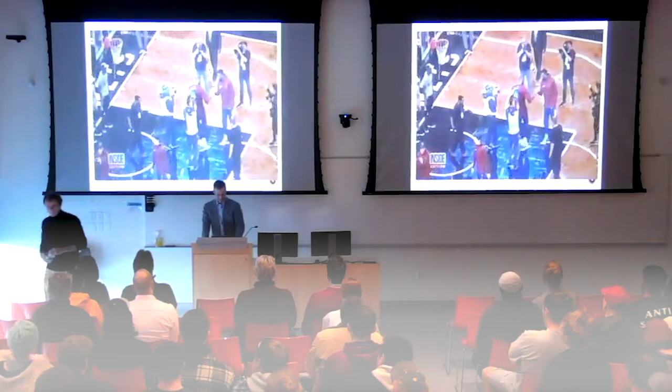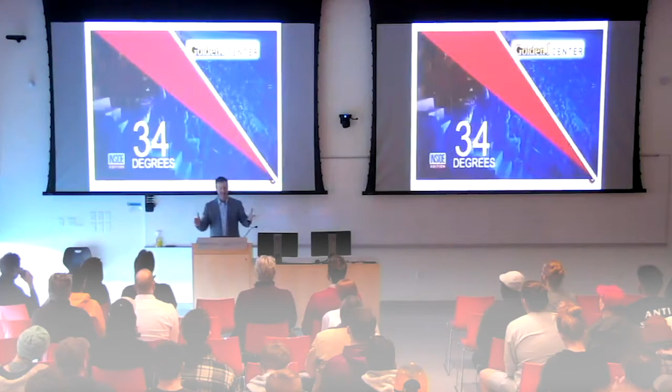Yeah, so here's the steepness as it gets steeper and steeper, because they want the sight lines and they want to save the money and make it a smaller footprint and have more seats that are closer, so they have to go up and up and up. I'm going to stop it at one - it's Lady Gaga. Then the Barclays Center was even steeper.

So then it's just making a commentary about how it's steep and people are falling on each other, and there's a whole bunch of lawsuits being started on that. And then I say something, and then I'll say what I was saying, and I'll pause it. And they had some weird angles of - right about here, all right, I think I stopped it there. So my commentary earlier was that as you have a seat in front of you, right?

So you're walking by, and there's a seat down in front of you, and the higher this gets up, if I'm walking here and I fall, I've got my knee and my hip, I'm not gonna fall too far, it goes down to your knee. At least maybe you can save yourself with your knee.

But when it goes down to your ankle, it's just a tripping hazard. So now when you lose your balance, there's nothing to reach onto, and you just keep falling. This happens more than you know, because when patrons fall, the center gives them tickets to the next night or even season tickets to avoid a lawsuit, because they want to keep selling beer.

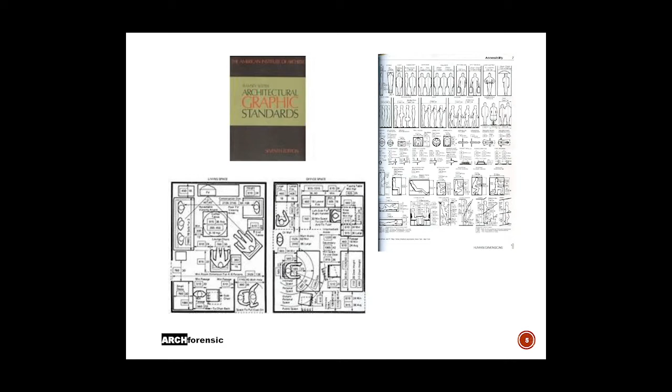So in the Architect's Handbook, here's pretty much a standard definition of the standard of care: it's what a reasonably prudent architect would do in the same community, at the same time, facing the same or similar circumstances. That's a general definition, and it has a location factor, the same in the same community.

Now we're more of a global village. The more we implement model building codes, the more similar you'll be from state to state. Not every state has the same building code, so there's still some location factors. I'm working on a case in El Salvador, which doesn't have the same building codes we have here or the same standards.

One of the standards in their contract was to conform to the ADA code — the Americans with Disabilities Act, a United States federal law. It's not a building code that has to be used in El Salvador, but it was in the contract, so they had to meet that without really any inspectors or anything happening. There was no reason they had to actually meet that.

So you have to adjust your judgment of architects based on location. Ten years ago in Pennsylvania, they didn't even adopt a building code for the state — it was only for cities. I was doing a case out in central Pennsylvania, and there was no building code, so they didn't have to meet any building code. In fact, there were no inspectors or building inspections, so the architect did his own inspections and got paid as a third-party inspector.

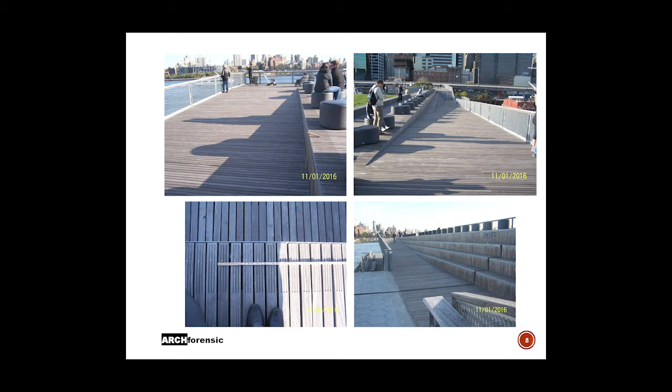So what happens if the code doesn't nicely fit into your design? You could do a design like this, and then you have to look at it in terms of code and ask how the code fits into this design. So they have this large handicap ramp and amphitheater seating, and it goes alongside the amphitheater seating. When it comes down to the sharp wedge here, this part becomes problematic, the sharp point there.

Because that looks like a little tripping hazard at the end - someone's going to come up and just trip over that. If you read this design from the code, when that lift is 0 to about 4 inches, that's considered a tripping hazard in the code, not a step yet. Then from 4 to 7 inches, I'm just guessing, that could be considered a step, although that would be the size of a step.

After that, from 7 inches to about 24 inches of rise, you wouldn't need a railing unless there were 2 steps getting onto that rise. So by that definition, you don't really need a railing across the top of this until it gets to 24 inches. Then you would need a railing. But as you go down to this end here, now this is considered an amphitheater, so since it's an amphitheater, you don't need a railing anymore.

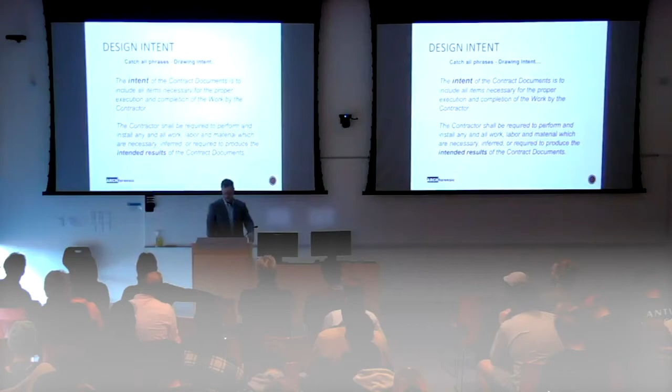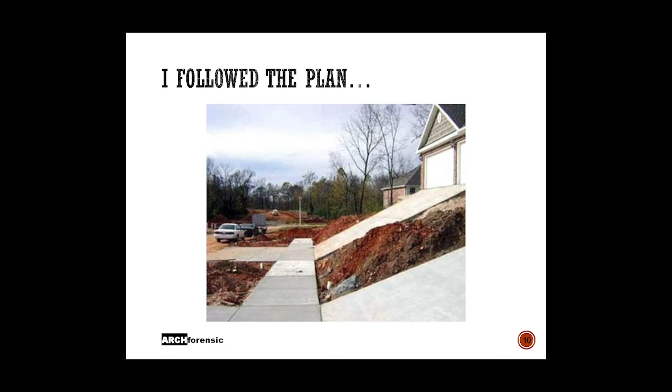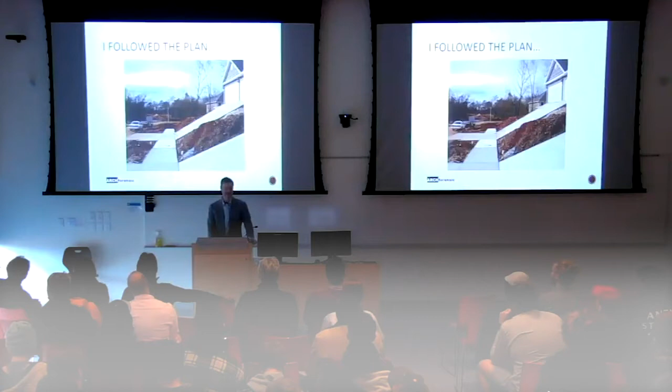So if the contractor or someone's interpreting plans, the plans may say to do this, and if you're looking at it, you might say, okay, that's what I'm going to do. This looks like a development, and on a site plan they may not have anticipated the distance. It looks like when you turn the corner, it's at street level, and they assumed it was flat, but when it turned the corner it was up high. I guess somebody poured the concrete without submitting an RFI.

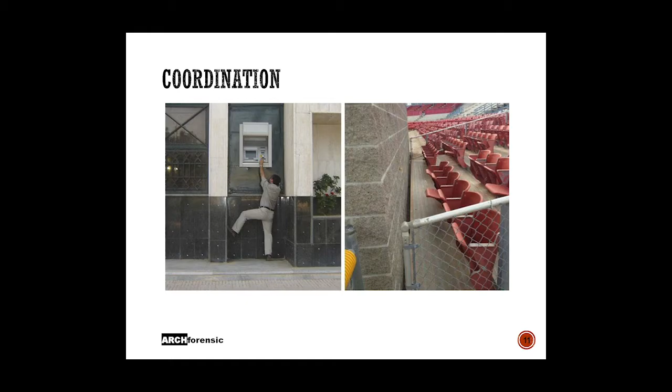Here's another potential coordination issue on the left. If you're doing a plan on the inside of a bank with a teller, and they say let's have an ATM, put the ATM at the end, and there it is, facing out. But if you don't coordinate that the stairs are 4 steps down and the sidewalk, then you'll have something like this happening.

The one on the right, I don't know, I don't have an explanation. So they needed a certain amount of seats, and somebody did not anticipate that wall being there.

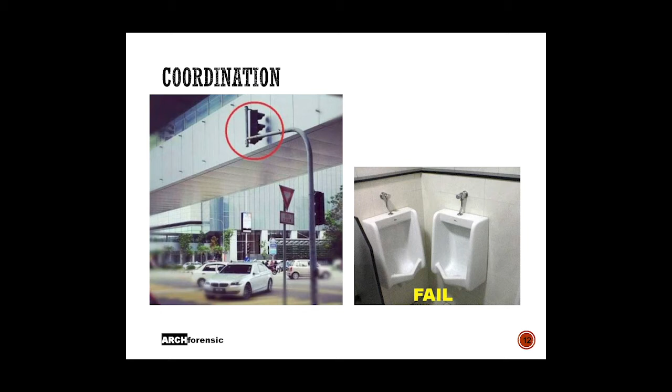There's coordination, there's a thing called Redicheck. Architects do have quality control and quality assurance. They don't have to redo the plans of engineers, but they need to look at them and coordinate them with all the other plans. So if you have a little fan symbol on your drawing and a little projector symbol on your drawings, they don't conflict in the drawing. But once you put the fan in with the blades, then it might conflict.

So this is a potential example of design coordination.

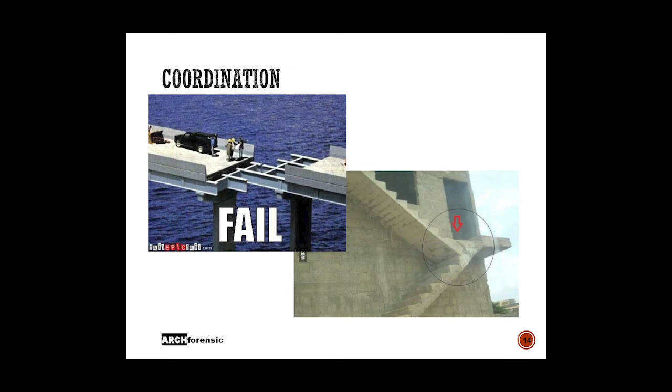I think the bridge one's fake, right? That one looks fake to me. I don't think they would actually do that. I'm not sure. The other one with the facade, I guess in a flat facade that would actually work, but I'm not sure what happened there.

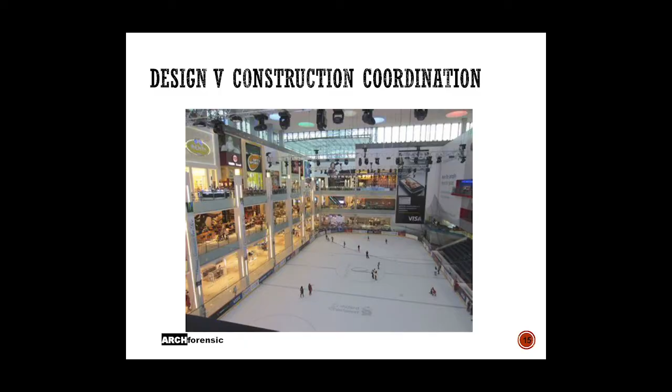So I had a case in Texas when I got a call and a lawyer said, I have a case, the ice is not melting in an ice rink in a Texas mall. And I said, well, why are you calling me? I'm in New Jersey. So I told him I never did a hockey rink, never did a skating rink, never did a mall. So you should go find somebody else. But if you can't find anybody else, I don't know if you'll find an expert who has done an ice rink in a mall before, right? So I'm like, I don't know if you'll find anybody, but if you do, use them. But if not, give me a call back.

Called me back in 2 weeks. He said, I can't find anybody. There's 2 experts who have done this, and they're hired by the other people on the team. So I was hired by the mechanical contractor, who was a sub in all this, and he was just providing the refrigeration to the ice rink. And so that's who hired me, a mechanical contractor. So I came on late in the game. He wasn't the main focus of the lawsuit. I came on late, I read all the other expert reports, and there was the foremost expert on hockey rinks.

And he got deposed. He had this excellent report, it spelled everything out. I read through his report and just started going through. He had all these equations for tonnage of cooling, and I just started going through all of his line items and doing the calculations right along with him, and he was explaining it in his deposition. And he had a factor, and it was just a factor that goes into the formula. So I was looking for that factor.

I finally found the factor, and the factor was: use this factor if you have a reflective ceiling that's less than 24 feet from the ice. That was the factor. So in the mall, you didn't have - and this isn't the actual picture, it was like this, but it had a black ceiling, and it had a food court next to it that produced heat. And all the other HVAC systems were all operating separately. So there's just a big airflow in there, and so it just wouldn't freeze because of that.

Same with a door that's hanging in midair in plan. If you're looking at stairs in plan and don't know which way is up or down, you might think you need a door, pop it in, and not check it in 3D. You could end up putting a door on the wrong side.

The quality control is to check your drawings. When judging and checking drawings for standards, you have to know what your drawings are for. You can have a biddable set that's not really ready for construction, or a biddable set that's not even ready for permits. You could have a permittable set for permits, not for bidding or construction. You have to determine what set your client is asking for, what your next deadline is, and what you're submitting it for.

So there's biddable, permittable, buildable. After the architect does the buildable set, do we build with that one? No. Then there are shop drawings—talking about a bigger commercial building here. The contractors, if it's big enough, will do their own coordination set, starting with structural, foundations, steel, and submit it to all the contractors, often without sharing it with the designer. That happens a lot. Then there's a coordination drawing the contractors do about where they're putting all their stuff, and that's the set they actually build by, not any of the sets the architects made.

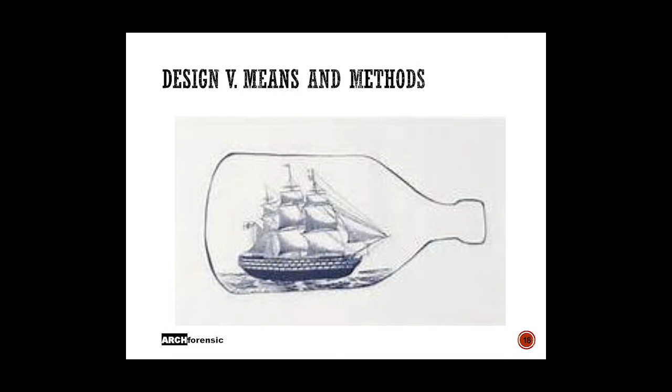So it's important to talk about design versus means and methods. My example: it's easy to design and draw a ship in a bottle—you draw a ship, put a line around it, it's a ship in a bottle, very easy to draw. But that's design. What are the means and methods to build that? Means and methods are usually what we say the contractors are responsible for—how are you actually going to build it?

If you submit drawings with your magic sauce wanting the ship in the bottle, contractors may bid and say, 'That's easy, I'll cut the back off, caulk it back together, silicone it—that's how I'll bid it.' But you've lost the magic there, haven't you? That exact example doesn't happen literally, but it happens that we do magic—architects have certain magic they want to do, and it might not get bid out the same way we intended.

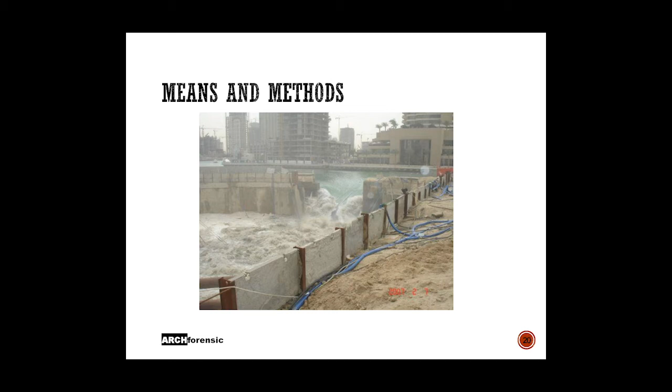Architects and engineers design the building as complete. We don't show a hole on the drawings—we don't draw the hole. We just draw the building in its complete form, not as it's being built. You can draw it complete with footings and foundations in it, but what actually happens, you've got to dig the hole, right? So here, weren't proper precautions taken to stop that river from flooding the whole foundation?

So I wanted to cover a few things you guys might use out in the field for inspection techniques and technology. Drones are big.

We threw the drone up and flew this whole association, and all of the chimneys had water ponding on them. A lot of the owners were complaining about water just underneath that chimney. It was getting into the false chimney, there was no flashing, it wasn't properly built, and it was getting into the master bedroom. So drones are great now for quick inspections of buildings, getting up high.

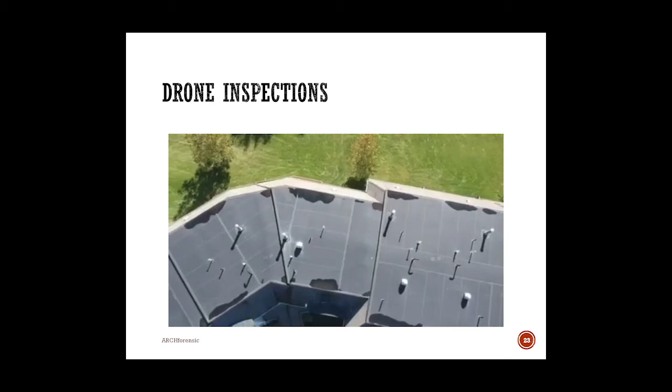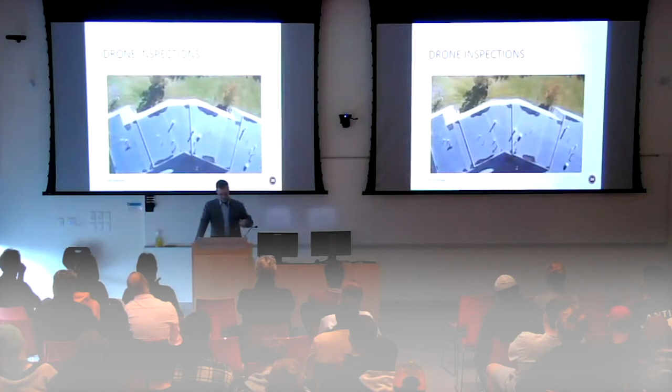It's a lot safer to put the drone up than to put two ladders up on the roof. You can get up high. This roof didn't even allow us to get a 40-foot ladder, so we had to go get a lift to go up there. Instead, we got the drone and flew it over, and we saw all the water ponding at the edges. We checked all of these flat roofs, and there was water ponding all over because of the way the flashing was done.

Then I had a claim in Cleveland, Ohio, and to do the inspection we had to get me out there and a material scientist out there to do the physical inspection, but instead we sent the drone pilot out there and had him fly the whole building with a live feed. So the material scientist and I were sitting in our office just watching the live feed.

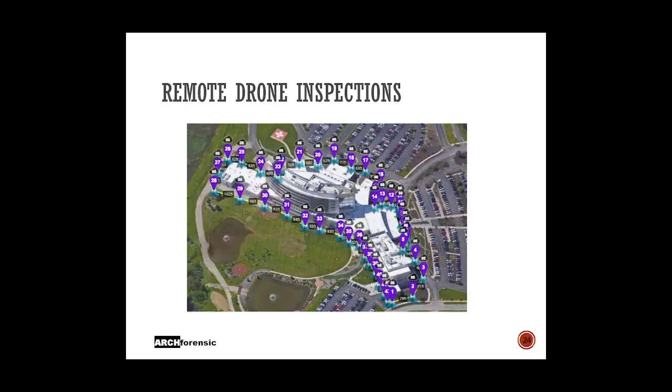We were on the phone with the drone pilot saying, 'Go back to that one, go back, go left, go right.' So we saved a lot of money by not having to fly both of us out there, the hotels, the eating, all that stuff.

The drone inspection covered a facade that was cracking, and there were lawsuits about the whole facade. We were able to get 10 feet from it very quickly, just flying around and seeing what's wrong. It still doesn't beat an actual physical investigation, we have to go back to actually take a few of these off, but to do a quick inspection of the whole thing, the drone was excellent.

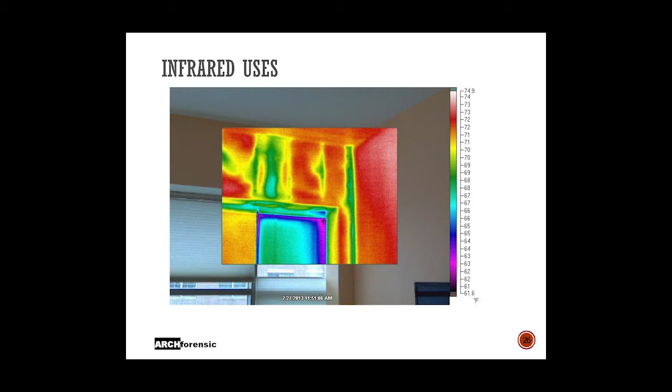Infrared is a great tool as well. I love using the infrared. When you look at a building in infrared, you can see the studs and the bays in between the studs. The studs are the green ones, and the bays are in between.

This bay here had a different heat signature. We're really just looking at heat, the green studs are allowing the cooling to translate through the wall, and the red is potentially insulation. That one bay was strange, we wouldn't have seen it or even looked for it. But when we opened it up, it just didn't have insulation in it at all, it was missing insulation.

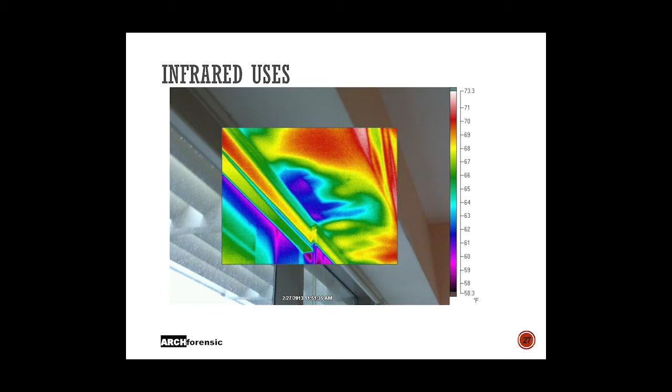This is a great tool to see through the walls and see how things are built. In this one, under visible light, when you looked at the soffit there were some leaks around this window, but not in that spot. The infrared picked up a leak above that without seeing any water or staining on the inside, so we cut a bunch of that stuff up and fixed it there.

This is a case that went horribly wrong. No, not horribly, I mean no one died, but it was a developer building a condo building in New Jersey. I call it the developer's paradigm: you want to build it as quickly and cheaply as you can, and sell it for as much money as you can. That's business, right? When you go that tightly with the minimum codes, as cheap and as quick as you can, there's no room for error. So if you make one error somewhere, it could be a really bad error.

In this case, they designed it as a non-combustible building, concrete, steel, rated. They value engineered it, but then ended up putting wood in it, and I'll tell you why in a minute. During construction, they tried to change it to a Type 3 building, which is masonry, a hybrid of combustible and non-combustible, so masonry exterior walls and wood on the inside floors.

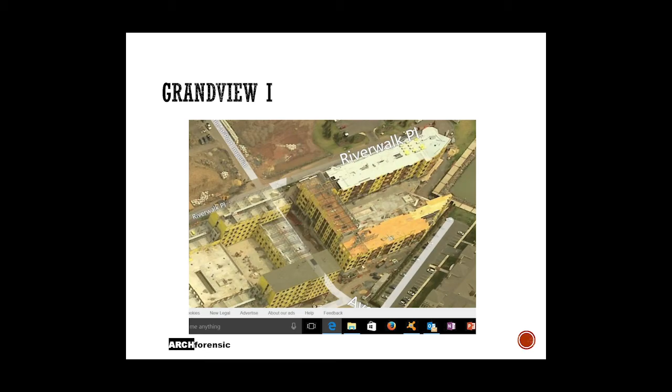And then we have communications and emails where the developer said, I don't care, put your carrier on notice, we're going to keep on working with the construction. And they said, it's time to use our political capital with the town to try to get this approved. And the architect says, I want to meet with the local building code official. And the developer said, nope, you are not allowed to meet with the local building code official, we're going to do it. And there's no record of the meeting.

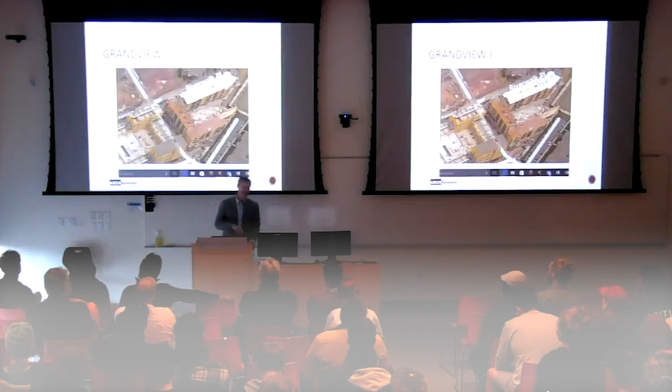And the building code official at that time, after that, was charged with taking bribes and went to jail. He was taking bribes within that time period that this happened. But in court, we couldn't use that, we couldn't say that because we couldn't prove it was a bribe in this case. We could only prove he was in jail and it was a bribe for all the other cases.

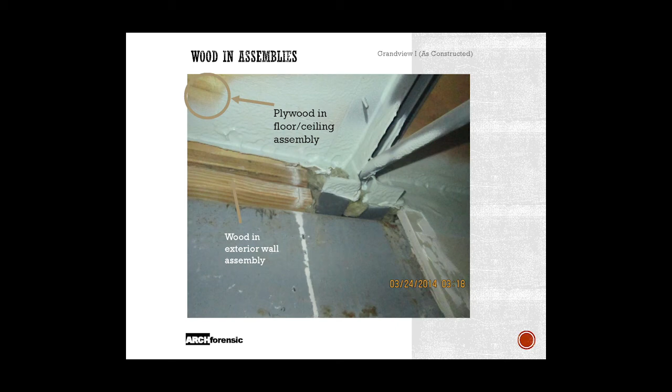So the jury still kind of saw through it. In court, I had to prove, even though we knew there was wood in there, we still had to prove it to the court. They would just kind of deny it and say it wasn't there. So we had to do a lot of test cuts, we had to open it up, we had to show the wood and show all this to the court and the jury.

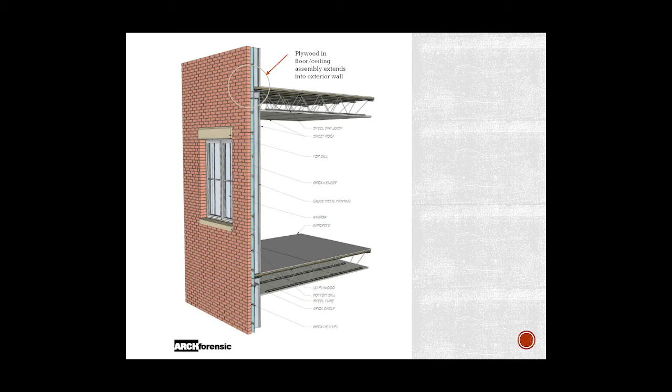And I was on trial for 2 weeks with the jury and did a wall section in 3D. It's really hard, jurors don't understand, it's hard for them to understand these things in a 2-week trial - to understand all about architecture and all about construction. So I actually brought in a metal stud and a wood stud and a block wall to explain the difference between the 3 things, starting very simply. So the jury saw through that. They awarded about $24 million actually, and they got more than that.

The code issue cost $1 million from the architect, because the architect did find it and try to stop it, but the developer wouldn't let him change it. So they took it easy on the architect. But they got the developer for fraud, which means you triple the damages. So they said $3 million to the developer, but because it was fraud, he pays $9 million, plus all the other attorney's fees, which are another couple million.

And there were other geotechnical settlement issues. But then they appealed this, and I was quoted in the appeal.

The panel of judges read all the testimony, and they quoted me saying, fire doesn't care about a waiver. The other attorney was trying to get me to say, couldn't you just get a waiver from the code, go to the local official and ask him for one? So I said, this building doesn't meet the code, the owners don't want a waiver, and the fire doesn't care if you have a waiver or not. So they quoted me on that, and they upheld it and awarded them all the money.

So if this ended up being a type 5A building, all the wood was most probably enclosed with a 1-hour fire rated drywall, right? Did they at least make it compliant with 5A? Yes, everything had a 1-hour fire rating. Still, if you go back to the picture in the beginning, it was a 6-story building, so it still wouldn't meet code, even 5A doesn't meet it.

When we actually examined this and all the connections, it was upside down, it was tangled, it was really hard to follow. But I had to say, okay, that's metal stud to metal stud with a good screw, that looks good, and then a metal stud frame here, good. And then like a little nail into a coping. I'm like, well, what was the coping attached to? You look at the top, and there's just coping with a wood nailer strip, and it wasn't even nailed in the same spot. So there was caulk and tar and little masonry nails actually holding all this together.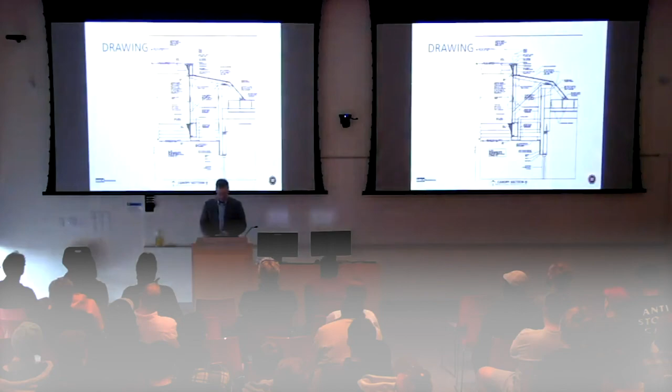The other thing that happened was that when the contractor built it, they did not do it right. This was the third architect's design, adding onto the first canopy. Here's where the first canopy was, then they added this on, and in the construction they did not put the tie back on. So it was just fastened right to the old coping, and with just a little bit of wind and water getting in there, it just fell.

Luckily no one died. It was in the morning, near a coffee shop and a nail salon, and people were coming in and out. It fell on all the cars because it was a strip mall, so the facade fell on all the cars but didn't hit anybody.

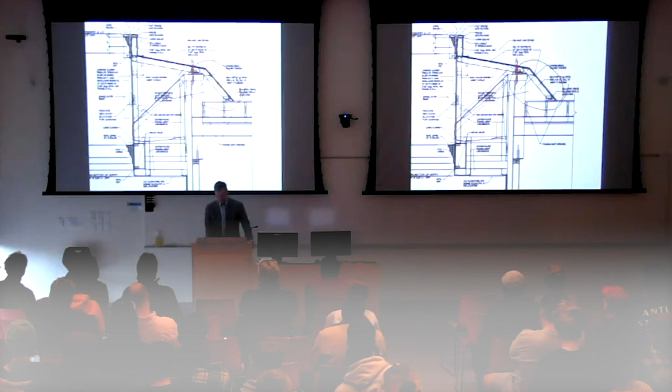When you do get out in the real world, what are some of the common reasons why architects are sued, or lawsuits start? It doesn't necessarily have to just be the architect, but architects get sued for errors and omissions.

There could be incorrect measurements. I'm working on a case right now that was a $123 million cost overrun, and the architect did not properly measure and investigate the existing building during a big renovation in New York City. So you can kind of put blinders on and say, well, I don't know what's above the ceiling, and I don't know what's in these columns, and you could sort of ignore that.

But to be prudent about it, you should say, I want to cut some of these open, I want to verify what's in there. Is it steel? Is it mechanical? Is it ductwork? Is it pipes? So not knowing the code, bad details, not educating and communicating with the owner, that could just cause it. It is up to architects and contractors to talk to the owners and say what to expect, set your expectations properly, educate them as much as you can.

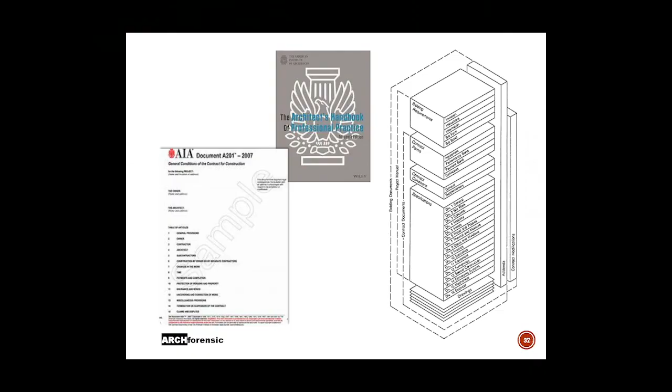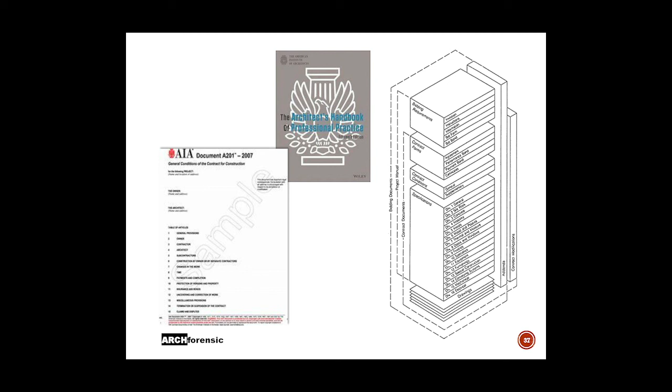And there's things to rely on, there's documents. I think the AIA handbook - I don't represent the AIA or anything - I think the AIA handbook's great, the handbook of professional practice. I use that all the time. I used it when I was an architect and referred to it and referred to a lot of things. They have contract documents, form contracts. They have a lot of those resources that are great.

One of the architect Latin translations is master builder, chief builder, principal craftsman - what an architect was way back when. And you may have done all those things, and architects can do all those things, but it's become so specialized that now an architect doesn't do all those things. They do some things, they can't do all the things.

But now you have a building envelope consultant, separate people, not necessarily architects or engineers, usually architects, but could be a non-professional, just somebody who's good at that, or the manufacturer - roofing consultant, window consultant. There's so many consultants that can help you with any part of the building that you don't know about, you're not aware of, you're unsure, you don't know about. You can call the manufacturer, they'll come teach you. You can get a consultant on the board, on the team if you need it.

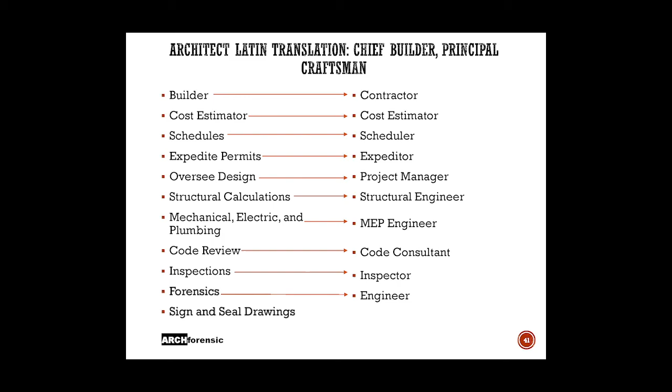Same thing with during construction. So, by the way, I guess all of these on the right are all potential future jobs that any of you could do. I mean, I know people who are spec writers, roof consultants. I know people who just do these things - sign consultant, hardware consultant, theater consultant. I mean, there's a lot of specialty that you can do in this field, and you can start from any level. There's plenty of just contractor-up people that do all of this stuff.

Same thing, kind of during construction, a lot of this - schedulers. I know a lot of people that just make a lot of money just doing scheduling and a lot of money just doing cost estimating. So these are just a little piece of what the whole world of design is that anybody could do - code consultants, inspectors.

So, I mean, I think architects are good at the big picture, though. So even if you have all these consultants, you kind of need somebody to put it all together. That's why we're considered sometimes the conductor of the orchestra. They consider you - you don't have to know how to play the flute, you just have to know how it works in the big composition of what you're doing.

So you could be a generalist, know a little bit about all of that stuff, but maybe not be an expert in every one of those. And so there's a lot that goes into the creative mind of the architect or builder or engineer. There's a lot of resources you can rely on, a lot of books, a lot of certifications you can get, a lot of books you can reference. And so that's it.